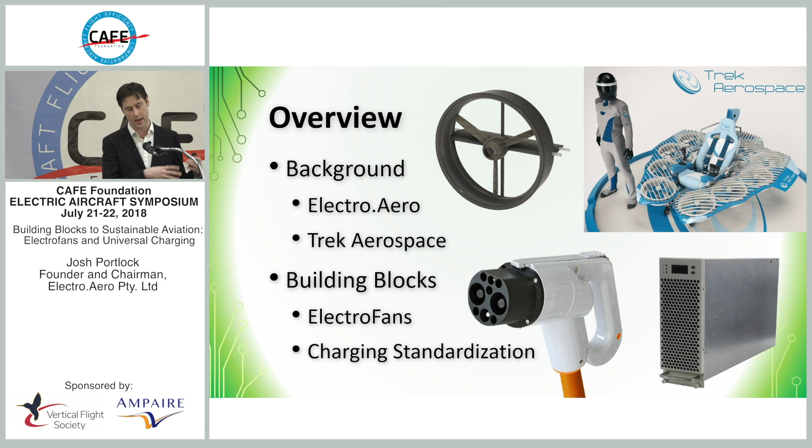So we're going to go over the background of Electro a little and what we're focusing on there. Trek as one of our key partners here in the US, and the FlyKart 2 is a bit of a fun project. But really what I've learned over the last 4 years of getting involved in this space, but particularly 6 months with operating the Alpha Electro, is there's still a lot of improvements that can be made in the building blocks to make this a really compelling industry. And I've sort of learned from the last decade of drones that you can do things better than trying to do everything yourself, and collaboration is definitely going to help us as a group rather than sort of secretive competition. So that's my push, is to get things more collaborative, and we feel we can contribute on the propulsive side and the charging side and work with others on everything in between.

Electro.Aero was founded by Australian innovator Joshua Portlock with the vision of safely propelling sustainable aviation. Beyond the environmental benefits, electricity and maintenance of electric aircraft cost significantly less than petrol and engine overhauls, making flying sustainably more affordable. Electro.Aero have partnered with Pipistrel, an award-winning light aircraft manufacturer, to represent the Alpha Electro in Australia and facilitate affordable training for new recreational pilots. For commercial pilot training, Electro.Aero is the exclusive distributor in the Asia Pacific for Sunflyer from Trek Aerospace. The Sunflyer is aiming to be the first FAA-certified electric aircraft with a proposed flight endurance over 3 hours, assisted by solar panels on its wings.

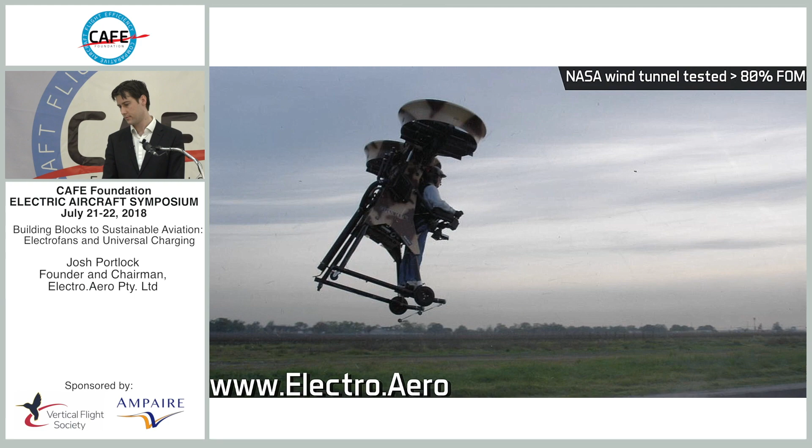Electro.Aero has invested in Trek Aerospace, the world leader in efficient ducted fan optimization. Together, they developed FlyKart, a personal flying go-kart concept that can be transported on a trailer and employs redundant fly-by-wire systems for safety. They are also developing a line of integrated electric ducted fans called ElectroFans. These will support a wide variety of VTOL and other aircraft manufacturers who desire safe, compact, and efficient propulsion systems. The long-term mission of Electro.Aero is to commercialize fleets of electric air taxis to fly passengers quickly and affordably over city traffic and water. For this reason, Electro.Aero has developed an automated booking system at Rottnest.Aero for the existing Rottnest Island air taxi services. This collaboration has further proven the need for electric passenger aircraft.

So yeah, the focus has been on both ends of the spectrum. So operating the latest state-of-the-art aircraft and helping distribute those in our region and really paving the way, particularly our relationship with CASA and leveraging that. And then the other side is helping the industry with modules of components and technology where we have some expertise.

So this is pretty exciting activity. Started this year, we got our first Alpha Electro certified. And the curious backstory is that we actually beat Pipistrel to it, even in EASA, and certainly the FAA is still trying to work out how to take out reciprocating engines from their light sport regulations. So we want to give credit to CASA and the fact that we have a long-standing relationship, and Paul Dwyer, our regulatory manager, has worked with CASA on the drone space for the last decade, helping pioneer that. So we had a really good relationship with them to have that conversation.

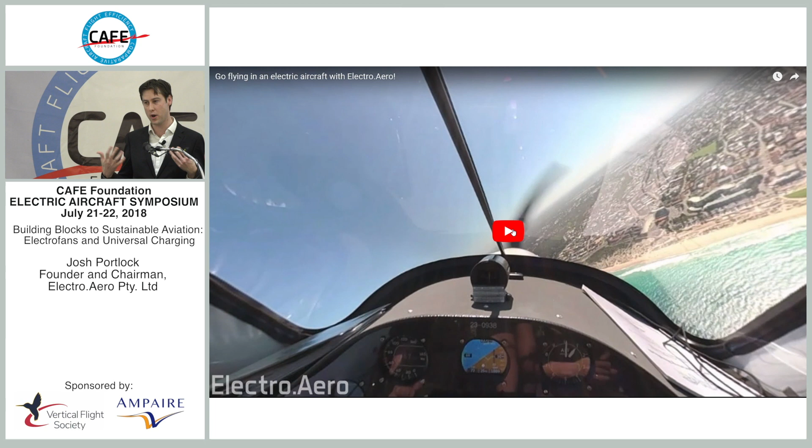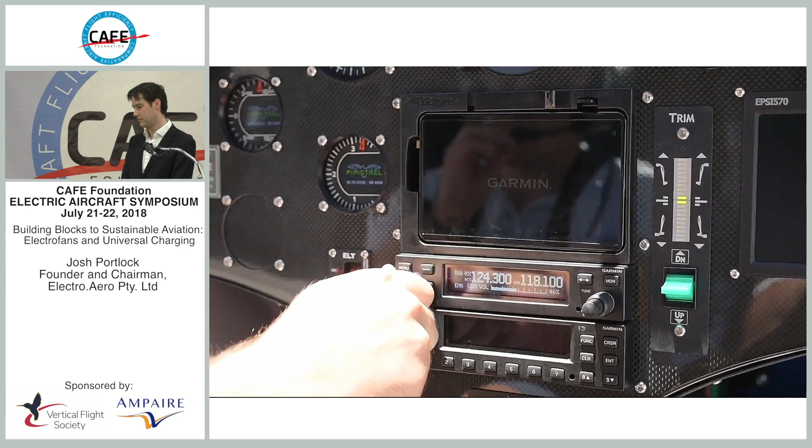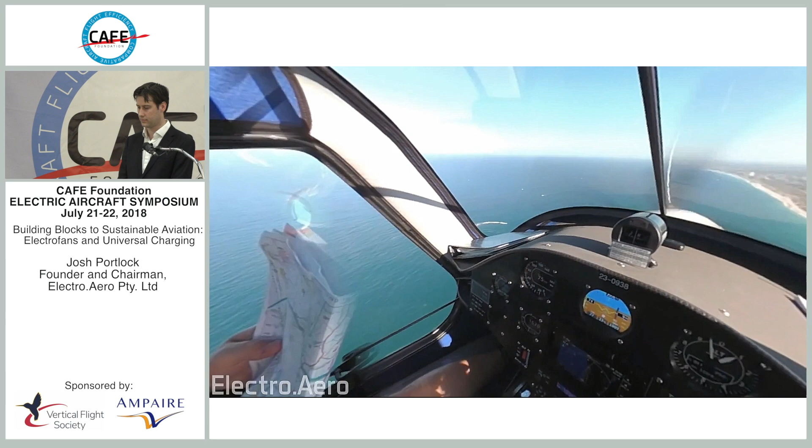Experience the world's first electric plane available to the public. And if you're feeling adventurous, you can even take the controls. Amazing. The views are incredible. The plane is really quiet. I think it's really cool that it's an electric plane. Like, I highly recommend it. It's one of the best experiences I've had. Book now at Electro.Aero.

So a bit of exciting things we've tried with it. You know, we pushed the envelope a little for this little alpha. We wanted to do our first cross-country. Now, obviously not across the entire country, but we wanted to demonstrate that it could fly more than the 25 nautical miles of a typical light sport aircraft. And there we went to a regional airfield to demonstrate that you'd have to actually do navigation and plan for fuel reserves and whatnot.

So ironically, this super lightweight little 380 kilo electric aircraft needed a 400 kilo genset to recharge it in the field. And even then, that genset in the 40-degree heat of Australia was struggling and tripping out from the charger, so we had to dial down the charger and things like this. So it goes to show the technology density that's gone into electric aviation versus legacy power systems.

It does put a question on hybrids being viable, in my opinion, because if that's a 20 kilowatt genset that struggles, it's going to be quite challenging to get that sort of power density out of hybrids and carry it on board the aircraft. But look, lots of lessons learned from that, and we really learned particularly about charging infrastructure being a huge need in the future, and I'll talk about that later.

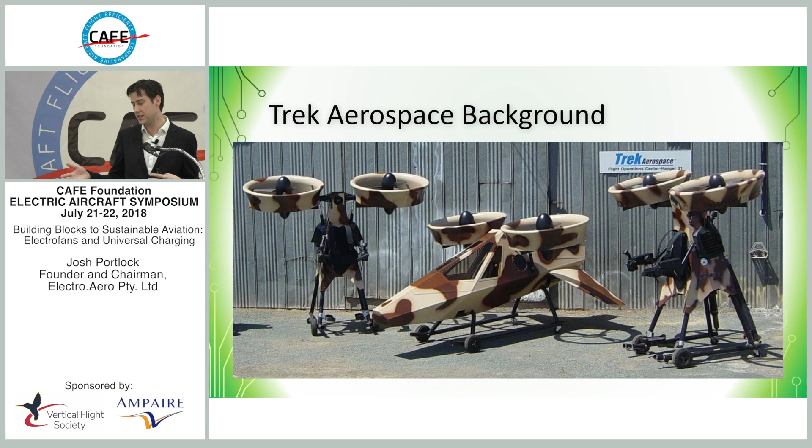Trek Aerospace, I feel, is a really valuable add to this industry, and they were really the pioneers of VTOL personal flight. I'm not sure if you're aware of this, but Rob Bulaga was the first to fly a powered lift aircraft over 20 years ago now, and they won a $5 million contract to develop the Springtail. And really, they led the way. They were innovators, but they were encumbered by engines.

They had these noisy rotary engines fanging behind them, running through really complex gearboxes and drive shafts, and that was what let them down. The reliability and safety of engines and noise and harshness really meant that it wasn't a viable product back then. So, fast forward 10, 15 years, electric started to be dense enough to propel electric fans. The ducts now make a lot more sense again.

You don't have to deal with gearboxes and engines and all that complexity. You can have a direct drive motor right in the middle. Then you start to really benefit from the aerodynamic efficiencies of ducted fans. Because if you've got a big engine in the middle of your quite compact duct, you're not efficiently propelling air through it. If you've got a little electric motor in the middle and it's all optimized for the flow, you can really see the benefits again.

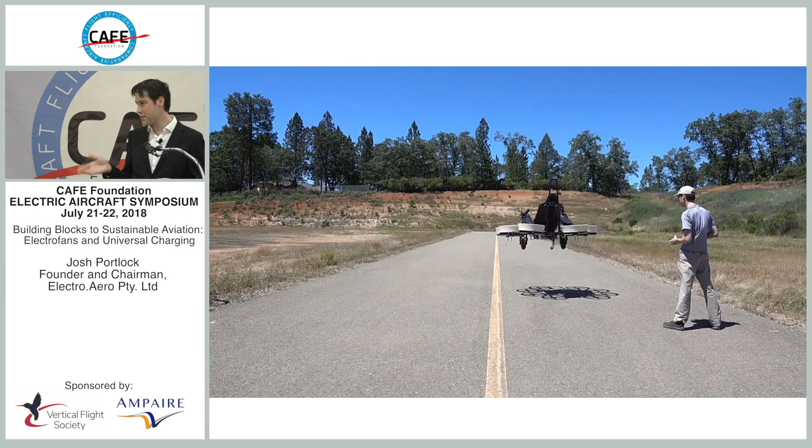So as a bit of a proof of concept, Rob and I built FlyKart, a 3-month rapid prototyping project, 3 months before 2016's CAFE, in fact. We said, you know, let's just build something to prove we can fly vertically with ducted fans and make it as compact and kind of cool as possible.

So the design requirement was fit on a trailer, you know, in any garage and mobile from the roads, yet carry a person and fly around. So we did this as a proof of concept. So I think it was about February we started designing it, and we had it flying by May before CAFE

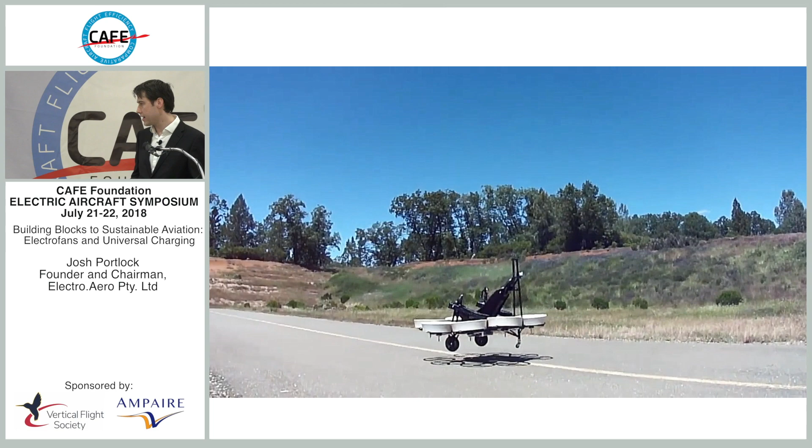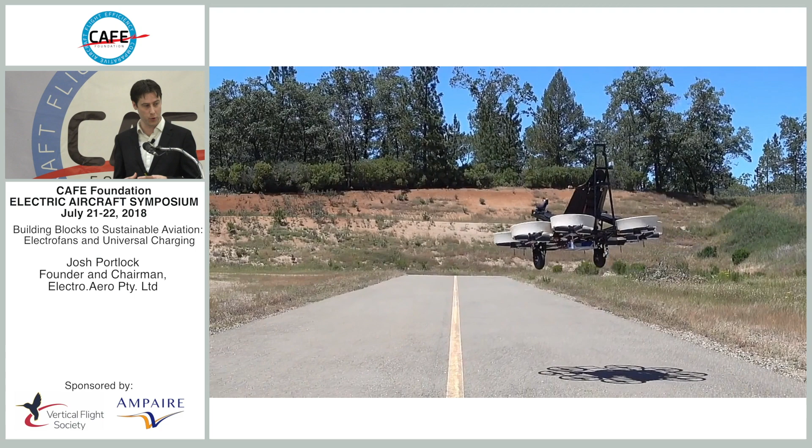2 years ago. And really what that did was, we were thinking, oh, I wonder if there'll be a big business out of this, selling personal aircraft. We were just sort of testing the market. But what did come out of it is people go, whoa, really? You're achieving that much propulsion power in that small footprint and you're converting electricity to thrust that efficiently? It's like, yeah, that's what these ducted fans can do.

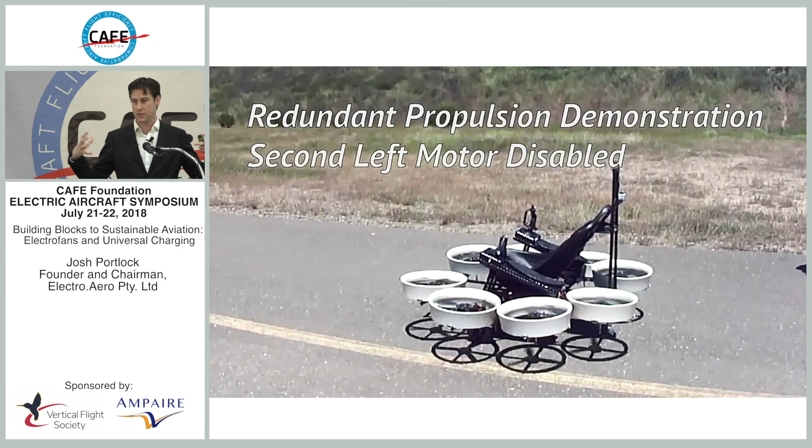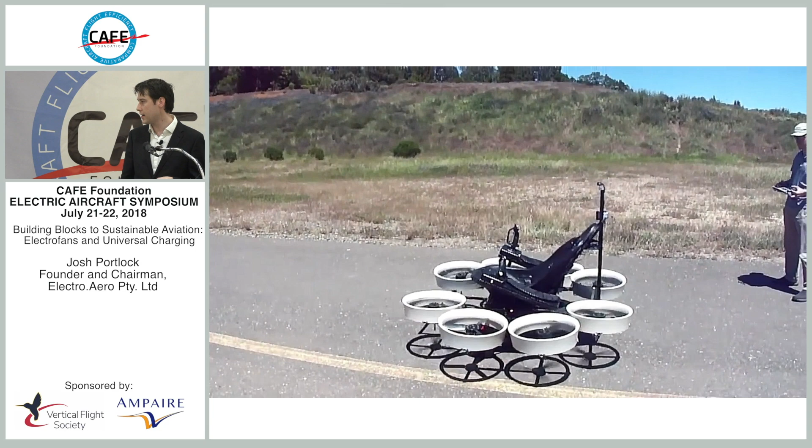This demonstrates the fault tolerance of an octocopter. It's no real news to most people, but it does show that the stability is just as good with 7. The only noticeable difference is that you can hear the 2 fans next to that turned off fan working a little harder because it's having to compensate and trim. But from a remote piloting point of view, I couldn't tell.

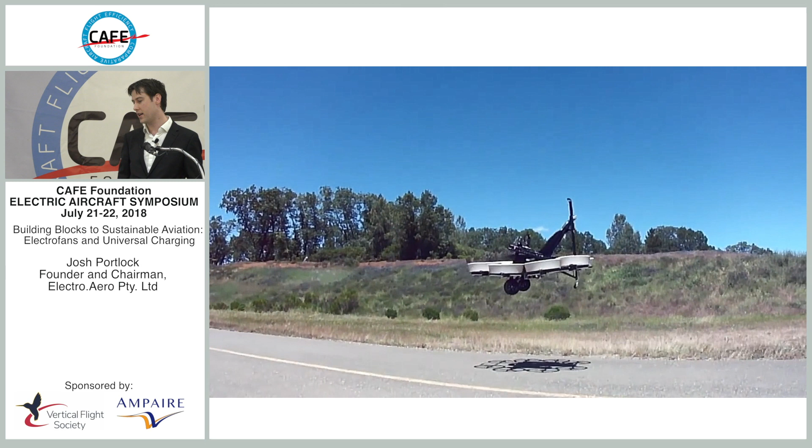So then along came GoFly. So GoFly announced a few months ago now that they were starting this prize, and I thought, oh, a good opportunity to dust off FlyKart and do it even better. So we basically designed FlyKart 2 around the design criteria of GoFly.

If you're not familiar, it's a Boeing-sponsored $2 million prize pool to design and manufacture a prototype of a personal flight aircraft that could fly 20 miles as fast as possible, but that's not the most important thing. It's as compact and as quiet as possible. And Rob and I are like, well, that's what ducted fans do, so let's enter this.

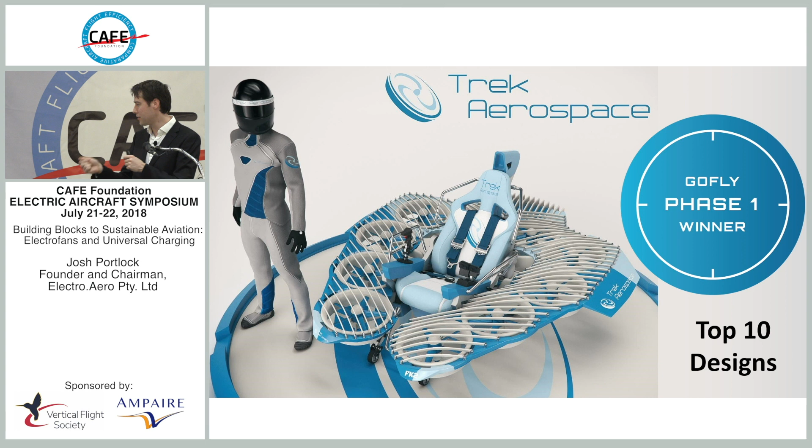So in the design optimization, we had to fit in the smallest space, but it's a very complicated, multi-dimensional design space, because if you're trying to optimize for noise, you don't want to have too high a disk loading. You want to have a lower disk loading, so in theory, really big ducts running less airspeed through them, and yet you get points for compactness. So there's a real push and pull on the requirements there.

But we ended up just adding 2 more ducts, and that was around the sweet spot for noise versus compactness. And still quite a comfy little armchair. People have called it the flying deck chair. And I guess the funny thing is watching the media results from this, right? Because the top 10 designs were all published on the web. And I was quite proud that we were there

was a chart for most likely to kill someone. We were on the lowest. So that was nice. We were like the least likely to kill someone. And then all the others had a little catchphrase like Death Trap 2000 with all the open rotors or really exposed cabins and whatnot. So at least we were the safest of them in the list.

And it is interesting to see public perception on this, because in some sense everyone wants personal flight, right? But there's a lot of pushback about the exposed cabins or the exposed blades and things like this. We don't necessarily see this being a short-term commercially viable product, so I'm not saying that we're trying to get this to market, but it's a fantastic education platform and a discussion point for what could be a reality one

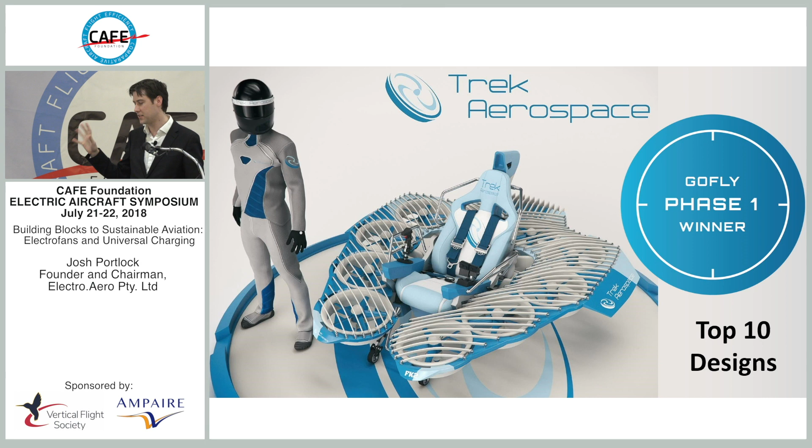day. I'm personally more interested in enclosed cabins and a more comfortable and safer environment, but it does kind of keep the excitement going with electric aviation and VTOL and personal flight. Yeah, another viewpoint for you.

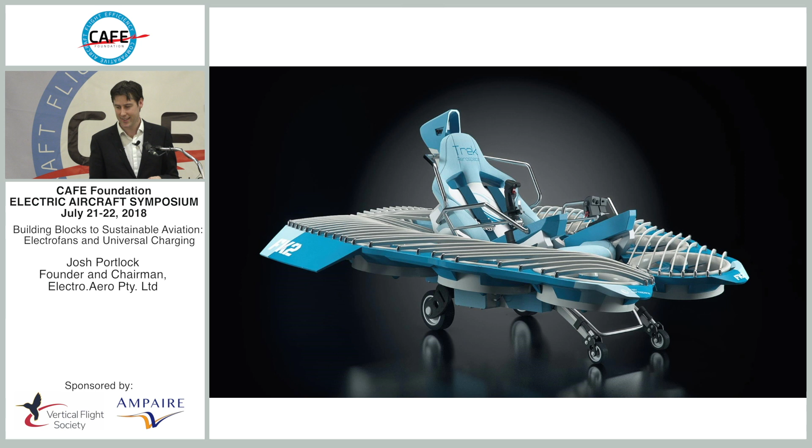We sort of went over the top on the CG to really wow people. So what I really want to talk about and share with this community is the building blocks of sustainable aviation. And I've sort of broken it down into these 5. Admittedly, 3 of them are collectively talking about charging, but it's actually a huge factor, and I want to emphasize that. We're helping on the propulsion side.

We're really focusing on those ducted fan optimizations, tightly integrating electric motors and speed controllers. But we're not necessarily focusing as much on batteries. We want to let the giants focus on the cell level. Let the Panasonics, LG Chems, and Sony spend their billions of dollars in the cell optimization, and Teslas on manufacturing. And then really partnering with leaders in integration of the actual batteries as far as safe housings and whatnot.

But where I can add some value and share with you is that we've really identified a need for modular propulsion. And if you look at the way aviation has progressed over the century, it's really accelerated when you separate airframers and propulsors. So if you think about the big names of the aviation industry, starting at the top, you've got the Boeings and Airbuses as airframers, and they have the Rolls-Royce, the GEs, and the propulsors as separate partners, right? And that's because they do that really well, and Boeing and Airbus do their airframes really well. So it gives some focus on what your value add is to the industry and ecosystem.

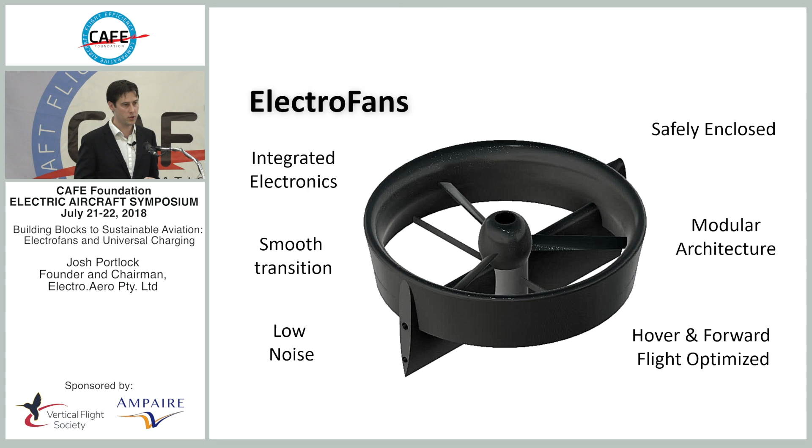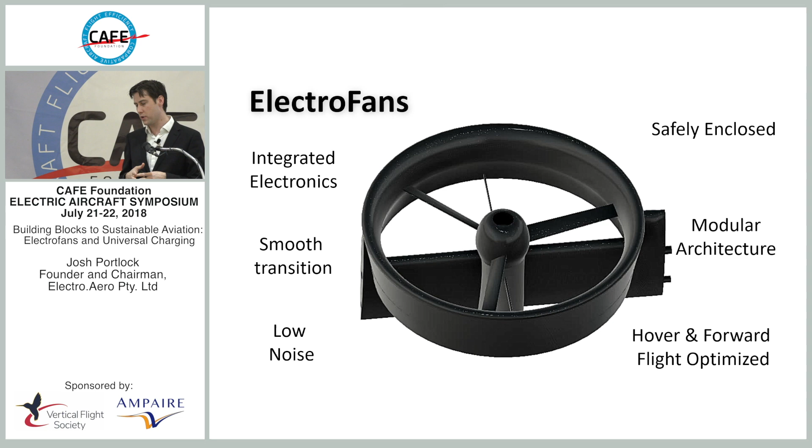The same can be said from the bottom end up about Rotax, 80% market share in light sport, and Lycoming having a fairly large market share in the Cessna and general aviation. So we see ourselves more as the Rotax of the sustainable aviation industry, rather than trying to build aircraft entirely from scratch. And as Kevin was saying, you don't really want to be trying to do everything from scratch in a closed box, because there's lots of other people out there doing it better, and if you collaborate you can actually value add a lot more, and we can get to these ambitious target goals much sooner.

So a bit of a technology discussion here about why ducted over open prop, and this one on the top right really emphasizes that the flight speeds that electric aviation is likely to be flying in the foreseeable future is sub 200 knots, and that's where our optimized ducted fans work quite nicely. So basically from zero, from a static hover point of view or thrust, you've got about a 40% excess thrust for the same power, and if you flip that around, for the same takeoff thrust, you're using about 30% less power, or effectively 40% more endurance.

And the nice thing is there's actually a hump in it, where during climb and slower speed flights, like an ultralight class, we're getting closer to 50%. So in a slow speed cruise, like an efficient L over D cruise, you're actually getting close to 50% more endurance out of the same battery size. And that's a real technology enabler. That's taking something like our Alpha from an hour endurance to an hour and a half, and other aircraft in that sort of 50% more range out of the same battery.

And the other way to flip it around is if you want a certain amount of range, that's now a 30% lighter, cheaper battery. That's a big deal from not just upfront cost and weight penalty, but your ongoing cost of replacing that battery and charging it every time.

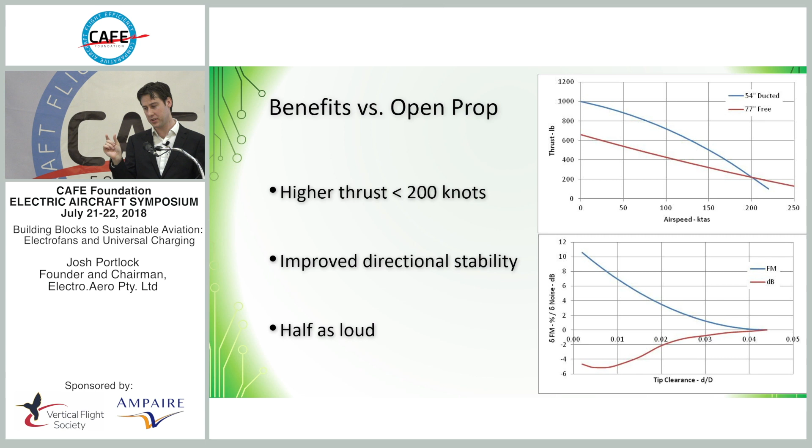So the cruise benefits are also quite important, and this only shows, I need to change this actually, because this only shows the FlyKart benefit of tilting forward. So as you tilt forward into the forward flight direction, the ducts produce extra lift. The leading edge of the duct is like a blown airfoil, because you're sucking air over the top and blowing it over the back. You're enforcing the attachment of the front half of the duct.

But this only tells half the story, because that's tilting at about up to 30, 35 degrees, so you're sort of flying forward at an angle. But if you then optimize an airframe to fully transition, like the Trifan, to have horizontal flight ducts, then you've got an even further reduction in drag by having an actual attachment of the flow over the ducts, and you're getting high-speed cruise, like a lot of these transitioning aircraft can achieve.

The thing that I'll emphasize here is that you're not really having to compromise your propulsor too much to do both hover and high-speed cruise, because you've got a higher disk loading by nature of a more compact duct. So in reasonably speed cruise, your same fixed pitch prop works quite efficiently, around 85% figure of merit in hover and around 80% cruise efficiency.

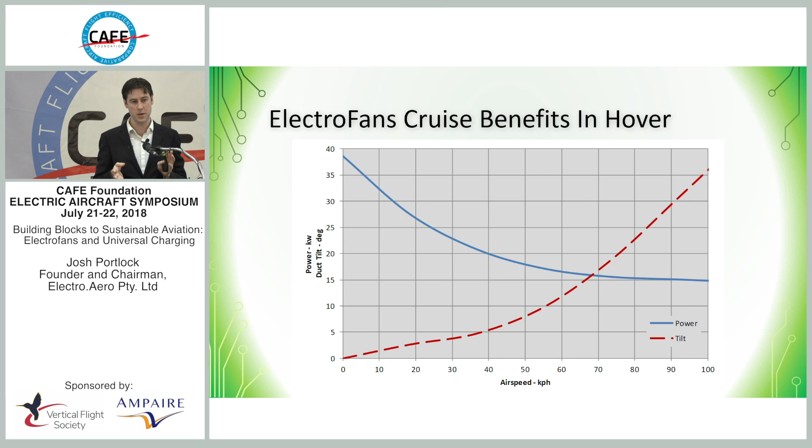So as opposed to an open prop, if you've started off in a hover and then you've transitioned with a fixed pitch prop, you're definitely going to trade off one or the other substantially. You're going to be back around the sort of 50 less percent in hover or 50 less percent in cruise. And that's a really big factor. It sort of further compounds the benefit of ducts in these VTOL transitioning aircraft.

Explaining the endurance trade-off with ducts, and this is kind of across the board with electric propulsion. You really want to get out of this high power region, where you're using a lot of power in hover, so you want to get to that forward cruise speed where you're reducing power substantially, and that's where your endurance numbers can stack up substantially. This is only showing a very minimal battery size, whether it's a hybrid system or a different combination of energy cells and power cells. This is just the worst case batteries we could actually integrate into the ducts.

And I have a provisional patent on battery integrated ducts. So it gives you a modular power system integrated into the duct itself, and then you add your high energy cells in the fuselage for longer flight times, or hybrid if you really want to waste your time on that in the short term. So it really depends on the mission profile, I should clarify. If it's highly endurance focused, then you may tinker with hybrid. And if you have a big enough aircraft to justify an efficient conversion system, then you go hybrid. But for the small aircraft, I'd highly recommend not doing it and focusing on just furthering the electrics.

Gyrocopters are a funny aircraft, not that popular here, very popular in Europe, because of their versatility of fitting in a garage for private ownership and being able to take off and land in relatively short areas. But by nature, they're quite power hungry, so they are about a 4-to-1 L/D compared to sort of 10-to-1 in a decent fixed wing, and that means it's really one of the less likely ones to be converted to electric because of that higher power consumption in cruise.

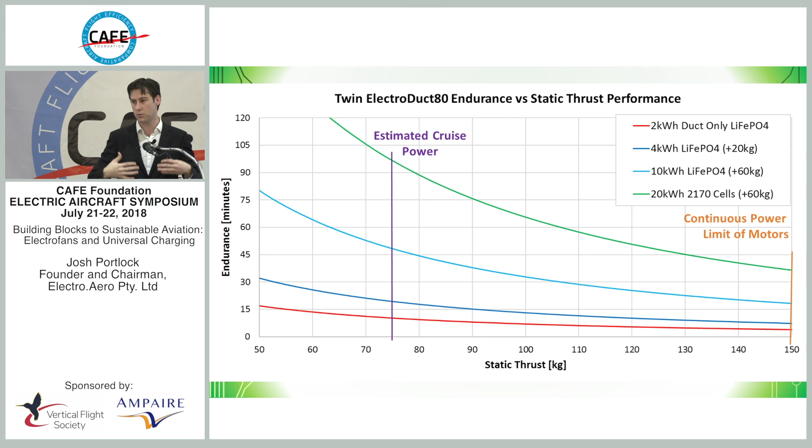And we did another equivalent for a fixed wing where we're getting 2+ hours endurance out of the sub 600 kilo takeoff weight. So we do feel there's a really good value proposition to collaborate with industry on the light sport category with our electroducts. One challenge we have though, that I'll be open with, is that twins are not very light sport friendly.

So we've talked with CASA and FAA and said our twins are just as safe as a single, very low dissymmetry of yaw and all these justifications that it's one lever, but no, they just sort of say, I'm sorry, that's sort of hard written into it as a non-multi-engine for light sport.

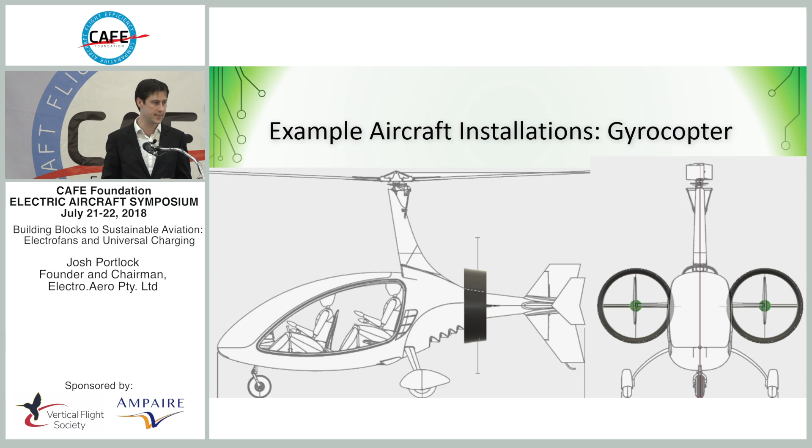So we see this more as experimental and maybe for people who really want to experiment with the latest state-of-the-art technology. But eventually twins in larger aircraft, 4- and 5-seat passenger air taxis, definitely make sense for that twin flexibility and redundancy.

Okay, chargers and standards. It's really racked my head the last 6 months. I have been really frustrated by charging standards, and I felt I should share not just my frustrations, but suggestions on what we could do better. And we can learn a lot from the automotive industry.

So if you look at what they did, and this is a little history lesson on the electric vehicle evolution of charging standards, there's half a dozen non-compatible mechanical, let alone the software protocols. So CHAdeMO came out, Japanese designed and manufactured, really driven by Nissan. Fantastic in the first principle of a lot of power through two big DC connectors.

And by the way, I'm not even going to talk about AC, because I don't feel AC is a viable charging standard for electric vehicles because you need a chunky AC to DC converter, which is dead weight on your aircraft. So you should always take that AC to DC conversion off your aircraft, maybe carry it in the aircraft if you're going to somewhere rural, but it shouldn't be standard equipment, right?

So just in DC, you've got CHAdeMO, reasonably high power. They're moving from 200 kilowatts to 400 kilowatts, so you can deliver a lot of power, but I wish I brought one with me, but it would have been oversized luggage because they're really heavy, like really chunky metal connectors, take a lot of force to connect.

There you go, bring it in for us. You can compare it to what I'm going to suggest.

But look, and credit to them, they pioneered, they led the way, so they had to just do something kind of over-engineered. But some lessons learned were Tesla said, all right, well, we don't need all this. Let's make as compact a connector as possible that just does 2 DC plugs at the highest power we're likely to need in the foreseeable future, and keep it all lightweight and compact.

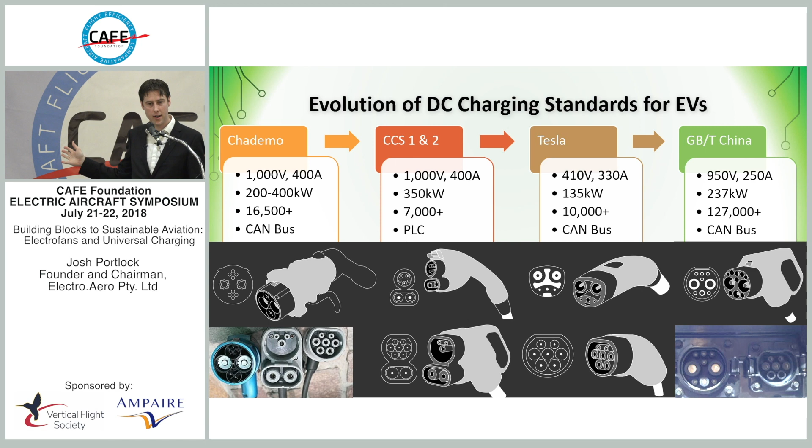But what it really does emphasize is that in China, the standard now is that there's a Mennekes Type 2 for 3-phase and a DC plug separately for the GB/T standard, and that way you kind of know you're either plugging in DC fast charging or AC. And on almost all aircraft, we wouldn't even have the AC socket to save weight and complexity and cost.

Okay, that's my pitch, but just to give you a warning that this isn't a done deal, and obviously I've got to try and get partners in this aviation industry on board with this recommendation of GB/T. So on Monday, tomorrow morning, we're meeting with SAE and ASTM, and I'm going to be talking more with George and others about making sure we do this right. So while this is my recommendation, I'm more inclined to say, let's just go with whatever everyone agrees with and be consistent and standardize, and that's going to be the best for everyone in the industry. So the jury's not entirely out, and there are new standards coming up all the time.

So by going with a GB/T standard now at an affordable cost, I forgot to say, this is only $120, by the way. So it is a very affordable connector that is really well manufactured. And I've bought several from different manufacturers now, and they're all quite high quality. So I'm at that point where the value proposition of this is just a no-brainer, but it future-proofs to upgrade to regional jet class, sort of bus level charging.